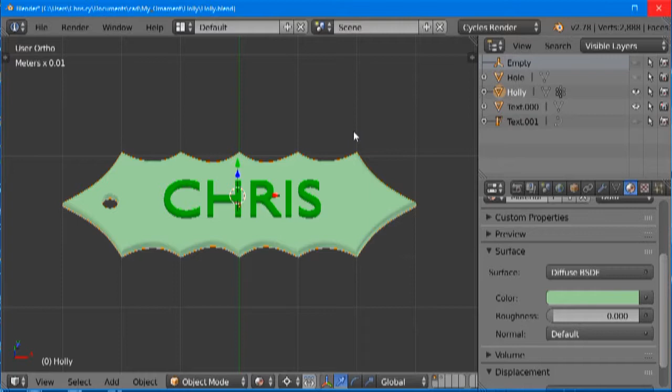Here I have the piece of holly with my name on it, and as you can see, as I drag the mouse around, I can tilt the object and look at it from any direction that I want to. I'm going to show you how I used Blender to create this object.

I started by sketching 3 curved lines that designate the outline of 1/4 of the holly shape. You click on each endpoint to define the start and the end of the line, and then you can adjust the line to make it curve however you want.

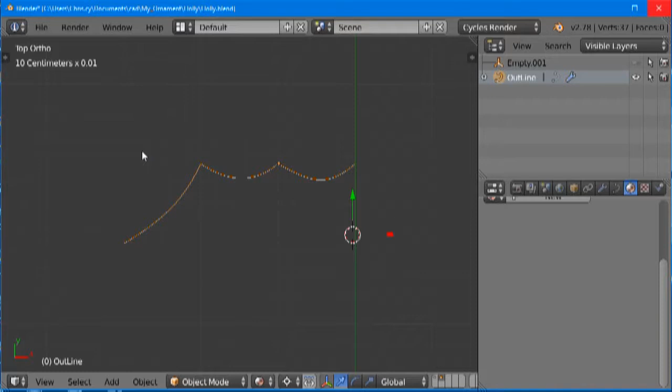Here I switch into edit mode, and you can see the orange straight lines connected to the curve are called handles. You can grab a hold of the handle and move it around to adjust the shape of the curve however you want. These curves are called Bezier splines, and they're very handy for drawing abstract shapes. It's easier than trying to freehand draw a curve using the mouse.

As you see, I can drag the handle around in different directions. As I do so, it greatly affects the shape of the curve. Here I've grabbed a different handle to show you just how widely you can adjust the curve. I can twist the handle around and make all sorts of shapes. Also, the length of the handle defines how much influence it has over the curve.

I don't need to draw the entire outline of the holly because it's symmetrical. I can use a modifier to mirror left and right the piece that I've already drawn. This mirrors across the y-axis. Then I do another mirror modifier to mirror across the x-axis.

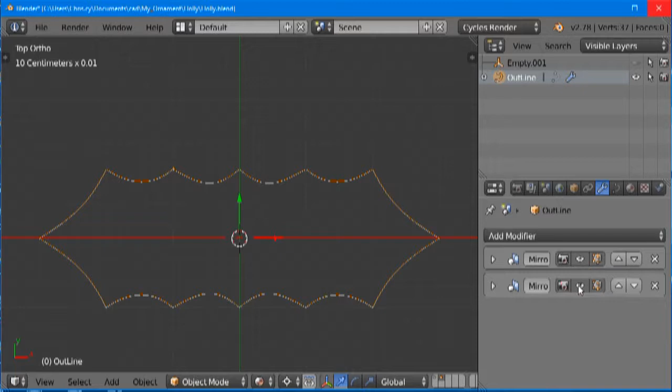I've left out a bunch of steps that show how I took this outline and created a solid object out of it. I also drilled a hole in the left side of the object so that you can hang it up like a Christmas ornament.

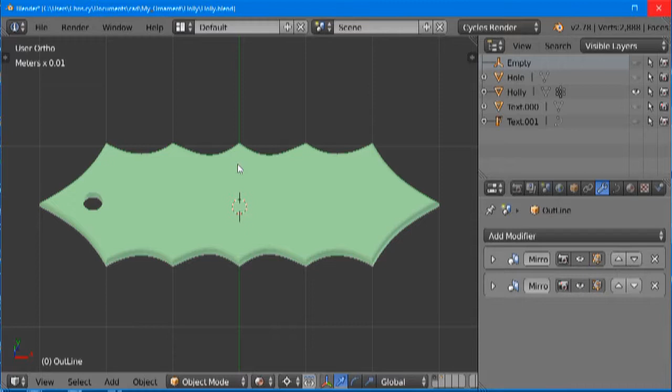As you can see, it's not just a completely flat object, but it actually has some thickness to it as I rotate it around. I'm going to zoom in, and you can see that I've added a beveled edge on the side of the object.

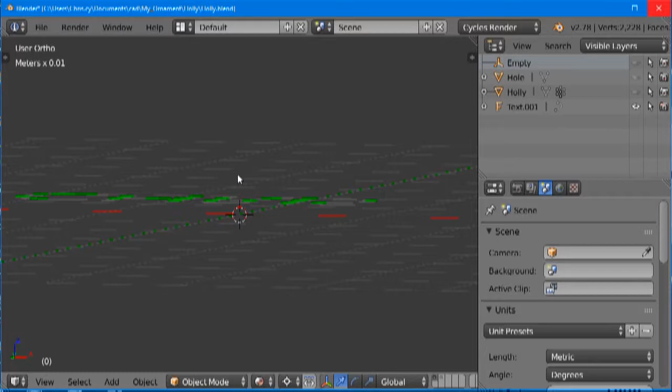Now I will show you how I created the text for the object. In Blender, text is a flat, two-dimensional object. Here I have my name, and as you see, as I rotate it around, it's completely flat. But we need to leave it in that flat mode so that it can be edited.

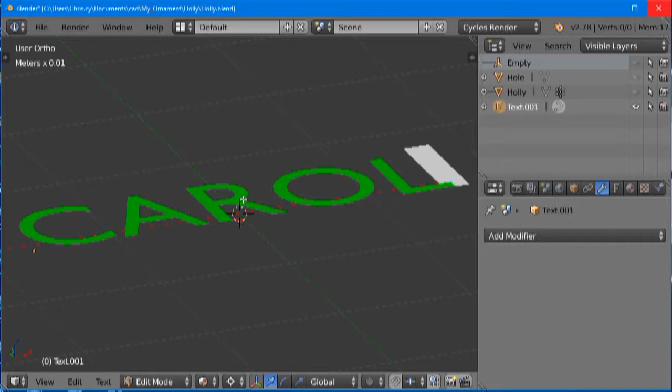I go into edit mode, and I backspace through my name, and then I add my sister's name. I had to go through this process for each individual ornament that I created for different people on my Christmas mailing list. Now I need to make a copy of that 2D text so that it could be later edited.

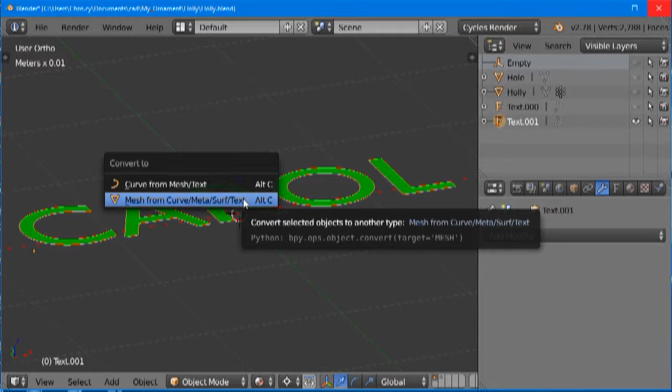I hide one of the copies, and the other copy will be turned into something called a mesh, using the mesh convert command. A mesh can then be extruded from a 2D object into a 3D object. I go into edit mode, select the object, and then tell it to extrude in the upward direction 1.5 millimeters. Now I exit edit mode and we have our 3D text.

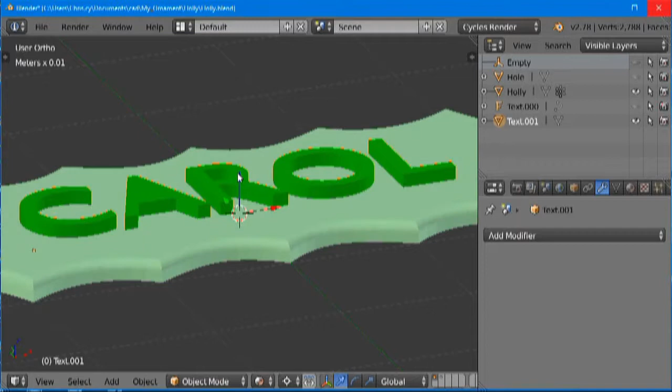We're going to bring back the holly piece, and as I rotate and zoom in and out, you can see how the text is above the surface of the holly, which is exactly what we're looking for.

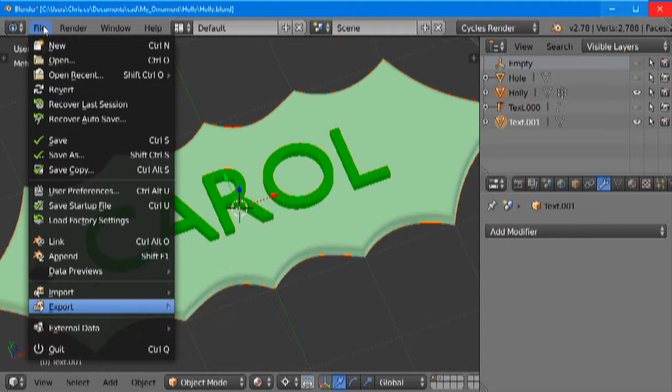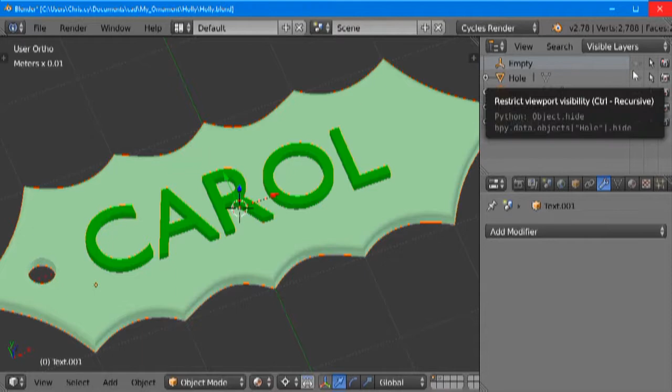After selecting both the text and the holly objects, we then go into the File Export menu and export as STL files. We click on Selected Only, and we go up and we type in the file name of Carol. And we are done creating our file.

Now we move to a 3D printer program called Simplify3D. We click on the Import button, which calls up a dialog, and we select carol.stl. It drops it in the middle of our build area.

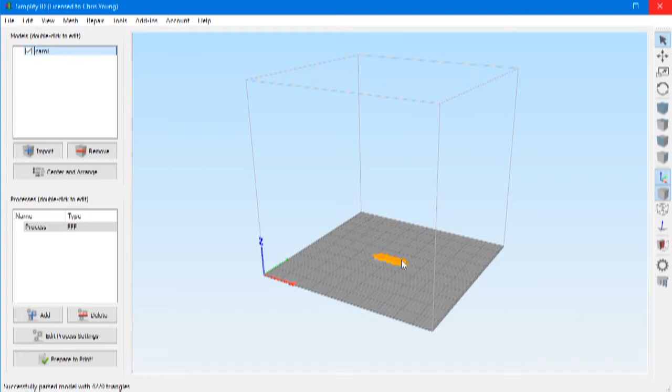This cube is sort of a representation of the capacity of our 3D printer to print objects. It puts it right in the center, and we're going to zoom in and show you what it looks like.

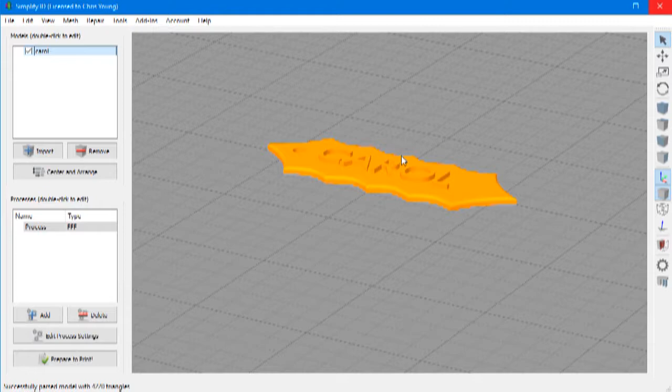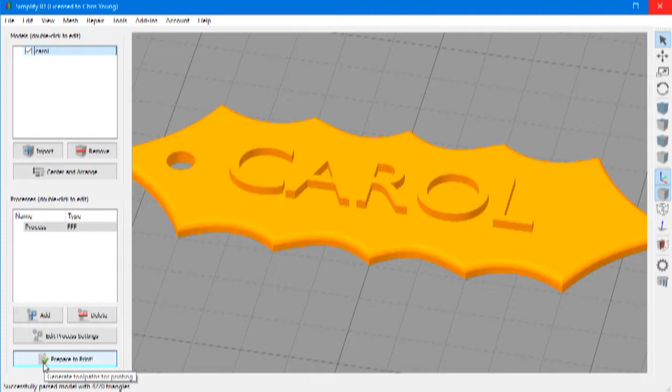Now we click on the Prepare to Print button, and it gives us a graphical representation of how the printer nozzle will move as it's printing the object. The line around the outside is put there so that you can sort of prime the pump and get the plastic flowing smoothly in the nozzle.

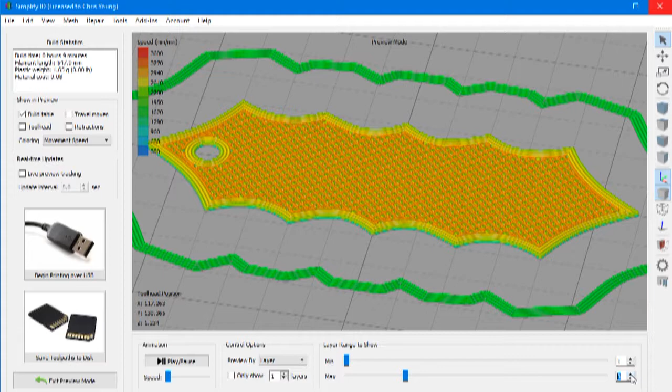Now we're looking layer by layer how the 3D printer will create the object. In the middle layers, it doesn't fill in solid. It uses a crosshatch of 20% of solid so that you don't waste any plastic.

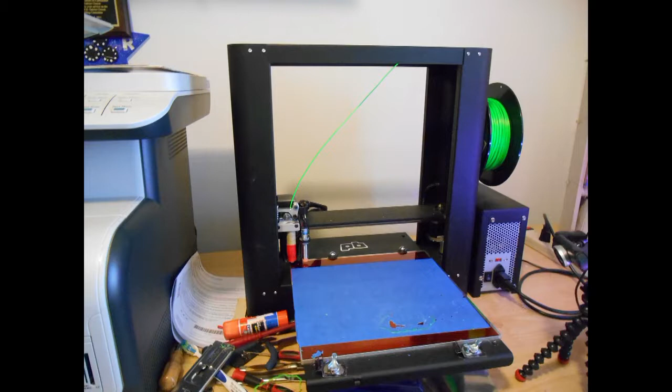This is a photo of my Printrbot Metal Plus 3D printer. I purchased it in 2015 as a 60th birthday present to myself. On the upper right, you can see a spool of green plastic filament sitting just above the power supply. That filament feeds into a nozzle that is heated at 210 degrees centigrade.

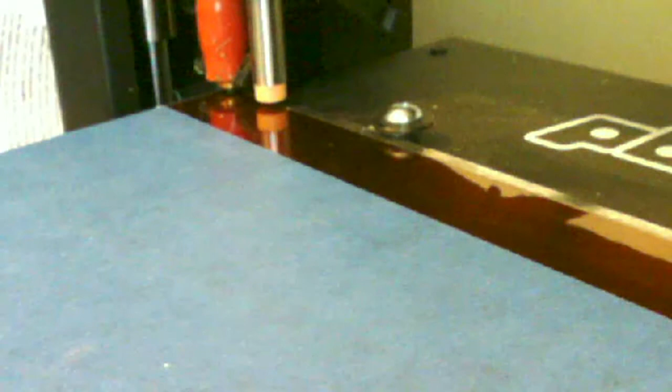This view is from a webcam that I have pointed at the build surface. This video is going to show you how I actually printed one of the pieces of holly. The printer first touches the nozzle down on 3 of the corners of the print bed to measure the height. That auto levels the print bed so that everything comes out nice and even.

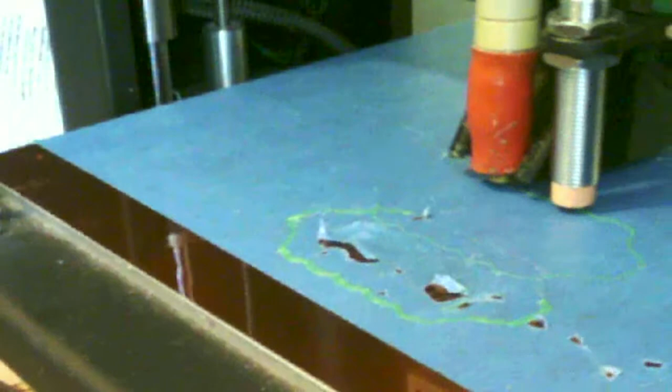We have to wipe some of the ooze off of the nozzle before we start printing. Unfortunately, the camera was pointed wrong and you can't see that. Now it's going to draw an outline around the object. You saw this in the print preview that we had in Simplify 3D. This allows the plastic to begin flowing smoothly before we actually begin printing the object. It takes about 3 wraps around the outside edge, and then it will start printing the interior.

The blue surface of the print bed is a piece of painter's tape. That particular type of tape seems especially well suited for printing on. It helps the object stick to the tape very easily, and it doesn't come loose while you're printing. Unfortunately, sometimes it's difficult to get the part unstuck once you've completed it. As you can see in the front, we've previously printed one of these objects, and it sort of tore up the painter's tape.

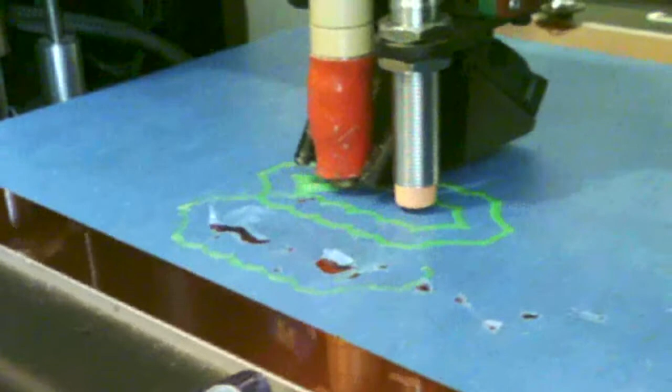After drawing an outline of the shape 3 times around, now it goes back and fills in, back and forth, back and forth. Each layer of the print is 0.2 millimeters thick, although we often print the first layer at about half of that height. The diameter of the nozzle is 0.4 millimeters. The entire object is going to be about 2.5 millimeters thick when completed.

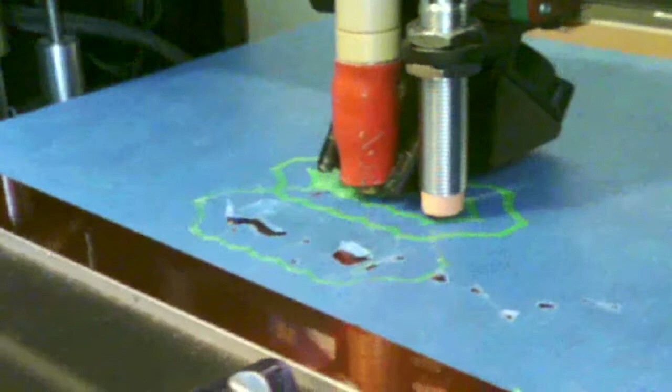In addition to printing the first layer at something less than a full height, we also print the first layer at something less than full speed. You will notice as it starts to print the second layer, the nozzle will begin moving much faster. Look how quickly it whips around the outside edge, the 3 laps, and how quickly it fills in the center portion.

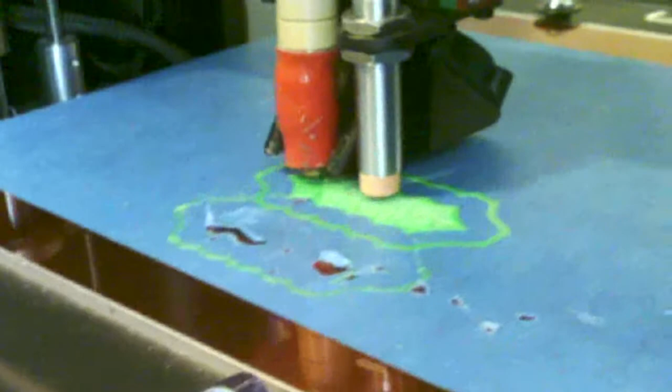Printing the first layer at a lower height and a lower speed makes it stick to the build surface better and gives you better results. It's not so critical on a big flat piece like this, but if you have a piece that has a smaller first surface area, that can be really critical.

I did not have the microphone turned on the webcam as I recorded this video. If I did, you would not have been able to hear my voiceover narration. The machine is quite noisy, making all sorts of buzzing sounds as the stepper motors move the build plate forward and back and move the nozzle left and right, and then raise the nozzle for each layer.

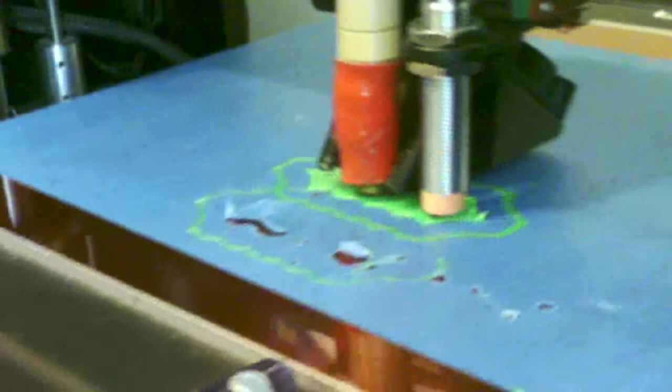Once the first couple of layers have been put down, the next several layers do not fill in entirely. There is a crosshatch pattern that only fills in about 20%. This saves a lot of plastic, not so much on a small part like this, but on a very big part, it saves a lot of plastic and a lot of build time.

Most of the objects I print take between 1 and 2 hours, but some really big projects can take hours, even overnight. I've seen some gadgets that people have built online where they let the printer run more than 24 hours. So 3D printing is not a very fast process.

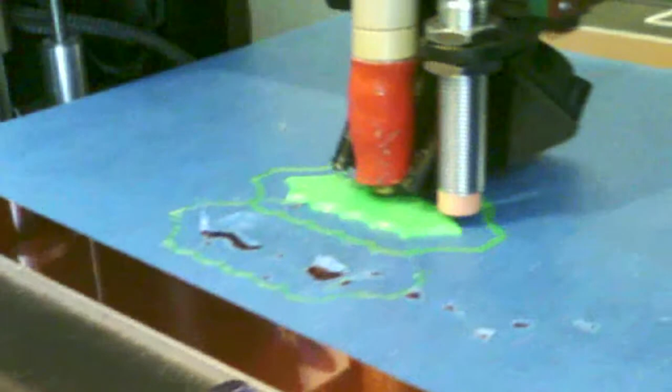We've now completed the basic shape of the holly, and soon it's going to start drawing in the letters of the name. See, it's drawing the outline of each letter. This video happens to be printing one with the name Linda on it.

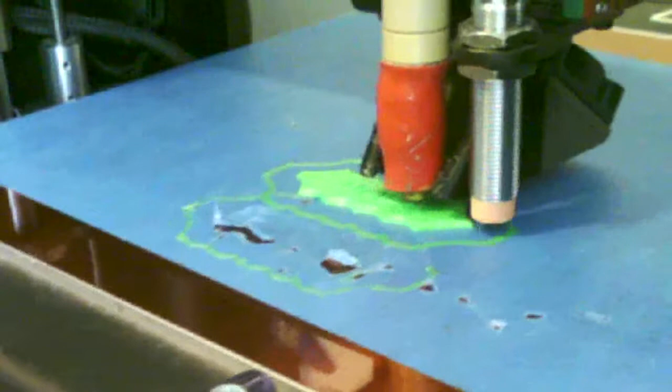And now the process is complete. The nozzle moves out of the way, and we're all finished. I hope this has given you some insight into how 3D printers work.